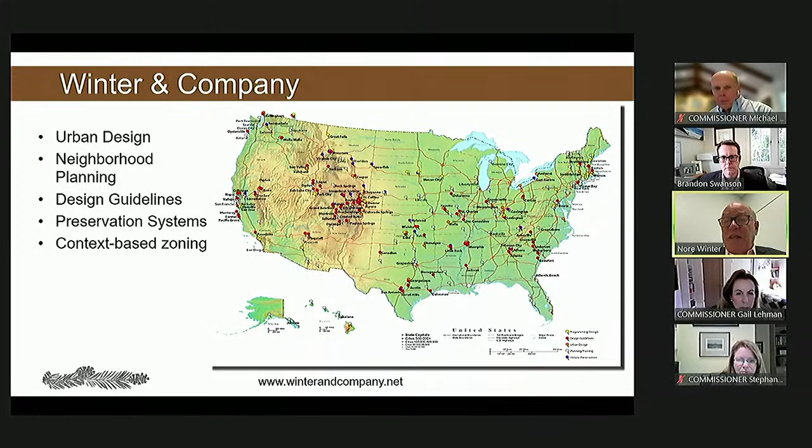We're starting from a good policy base that includes the general plan as well as a variety of other policy documents. We've been reviewing the background information related to the existing guidelines and zoning code along the way. Of course, some new factors that are influencing what goes into the guidelines today are recent state laws, such as SB 9 and the regulations about accessory dwelling units, and just the housing goal numbers that each community has now. There are a variety of informal materials that staff have been collecting over the years, a list of revisions, particularly to the zoning code, that should happen as a part of this project.

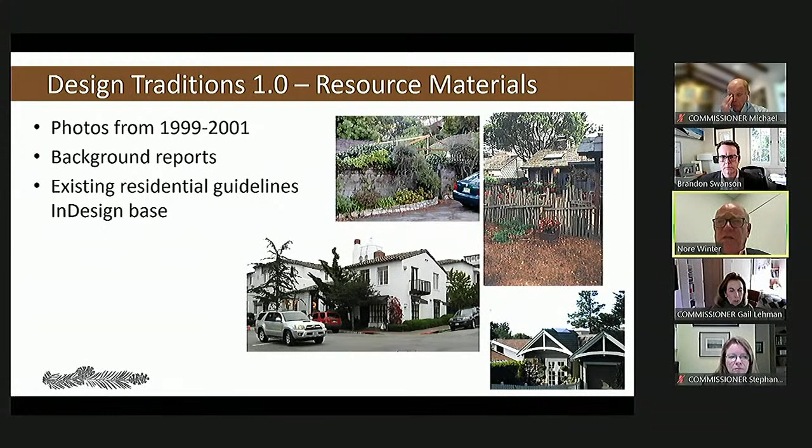The project is organized into a series of steps that are designed to bring us through a fairly logical step-by-step decision-making sequence.

The first objectives are to certainly get a good handle on existing conditions and then a good handle on the community sentiments.

We are planning for a community workshop coming up later in June. Out of that and the background information that we've collected and the work sessions we're having with staff...

...as well as the steering committee, we'll be developing a strategy that is an outline of the revisions that we propose be made. We'll be bringing that back to the community to confirm direction.

We'll have another community workshop related to that and also be presenting it again to you. Based on that direction, then we will move forward developing the formal draft materials for the design guidelines and for the zoning amendments.

That also will then be presented back to the community. We will make revisions based on comments and then develop the drafts for adoption with a target that adoption hearings would be occurring early spring of next year.

I mentioned the steering committee, and we've been meeting with them on a regular basis. We had a great work session a couple of weeks ago, and now we are preparing for the community workshops. We're saying they're hybrid, meaning they will be hands-on in person, but people can also join in online...

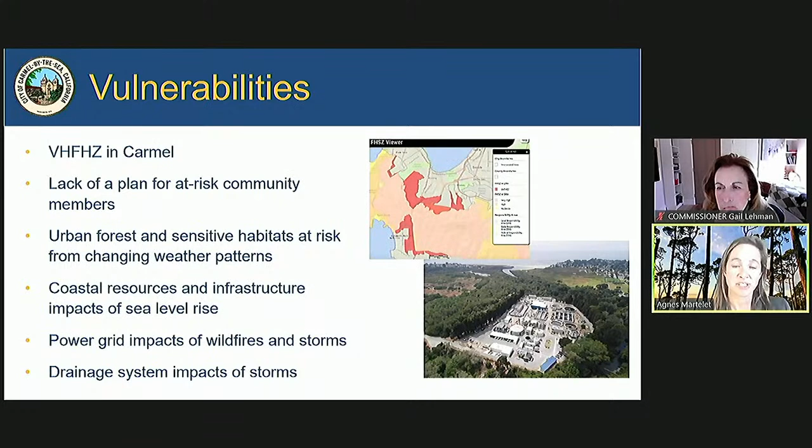We also have power grid impacts from wildfires and storms that we're already facing, and drainage system issues, including undersized drainage systems that need a lot of repairs.

The first policy to help our community resilience is to provide effective emergency preparedness and response in anticipation of potential climate-related disasters. Here we're trying to address updating our evacuation plan, making sure it takes into account our at-risk populations, and making sure it is shared with the community, that people are aware, and that we work with our community partners to make sure everyone is aware of our hazard planning. The other element under this policy is to work with our regional and community partners to increase wildfire resilience through inspections and FireWise certifications.

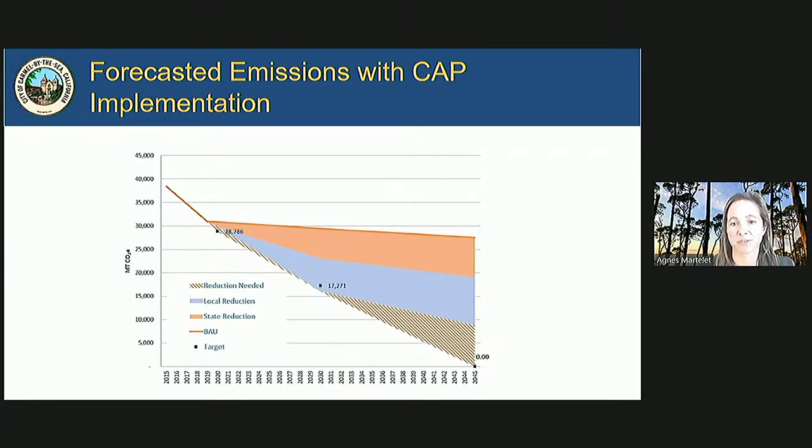And also incorporate in it the state's scoping plan, the latest scoping plan that will want to go also to carbon neutrality statewide, so that we can dovetail with the state and learn from our implementation so that we can get to carbon neutrality by that date.

First is to build on existing programs and partnerships. We have existing programs and we have many existing partnerships. So really building on those and leveraging those is critical.

Then is phasing implementation. We're not going to be able to do this in the next couple of years. This is a multi-year program, and phasing will help us be more successful in implementation. We'll also need to do significant public outreach and communication, because without the public, these plans, the implementation will fail.

Then the committee also recommended monitoring and evaluation on a regular basis so that we can adapt as we go, as we learn, as we implement. We can adapt and maybe change as needed and as we learn.

The committee also recommended hiring a grant writer / climate coordinator position to get funding for these projects, but then also help monitor and keep track of implementation. They also recommended the establishment of a sustainability commission that would help oversee the implementation of these two plans.

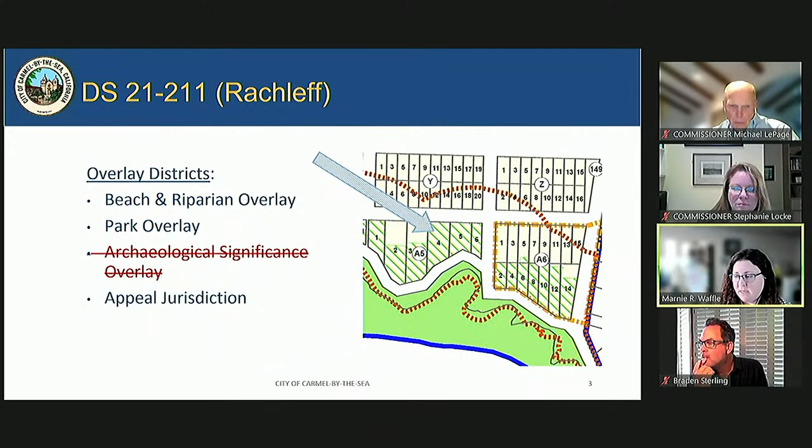Again, because the project is in the Beach and Riparian Overlay District, building height is limited to 18 feet. This is an existing nonconformity, so we're just documenting the existing ridge and plate heights. The applicant is not proposing to change those as part of the project. Staff has included a special condition that if the second story ridge beam or the structural roof framing is removed, the height of the building will need to be brought into conformance with current standards.

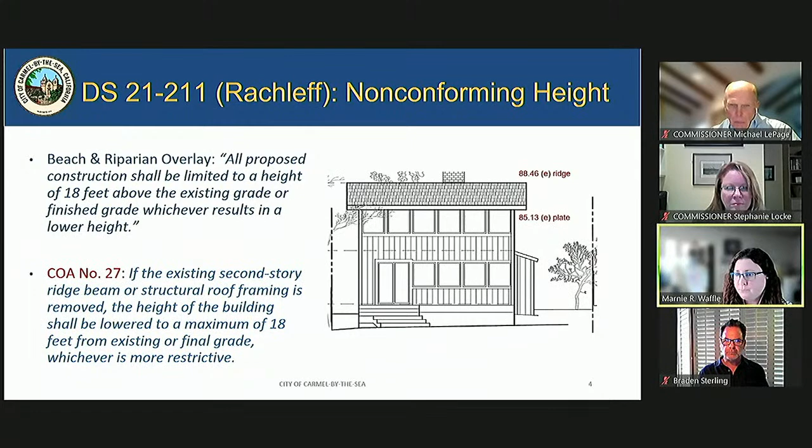So now I'm going to walk through the final details for the project. You did see some of these at the concept level.

The proposed building materials include horizontal natural age cedar with a clear sealer, proposed on the upper floor with board formed concrete on the lower floor. The board formed concrete would have an 8-inch rough sawn plank finish.

The proposed roof material is a standing seam metal. The plans identify it in bronze, but the applicant may want the option to do bronze or black, so that's something the council or commission can consider this evening.

Condition of approval number 29 requires the applicant to submit product information for the roof. Just prior to the meeting, I did get some product information, and the applicant is proposing to use Western States metal roofing, which has a very high matte finish and is found to be acceptable on other projects.

With respect to windows and doors, the applicant is proposing metal clad wood for the windows and most of the doors. The front entry door is proposed to be a glass pivot door, and the garage door is proposed to be a metal sectional door. Condition of approval number 30 requires the applicant to submit product information for all windows and doors prior to issuance of a building permit.

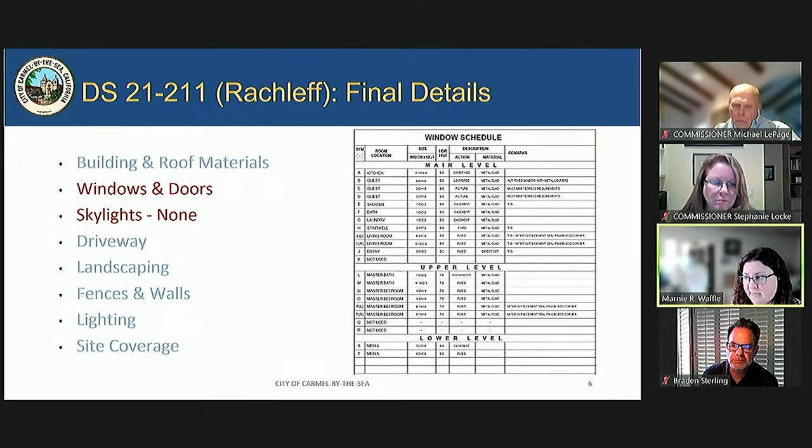With respect to the driveway, the applicant is proposing an permeable stepping stone paving block system in varying widths. The paving blocks amount to about 65 square feet of site coverage on the property, and the driveway is extended into the right-of-way as recommended by the residential design guidelines.

For final details review, staff did not get a representative photo of the material showing a color or finish. So the Planning Commission could provide direction to staff and the applicant on the design and material, and could consider adding a special condition of approval as appropriate.

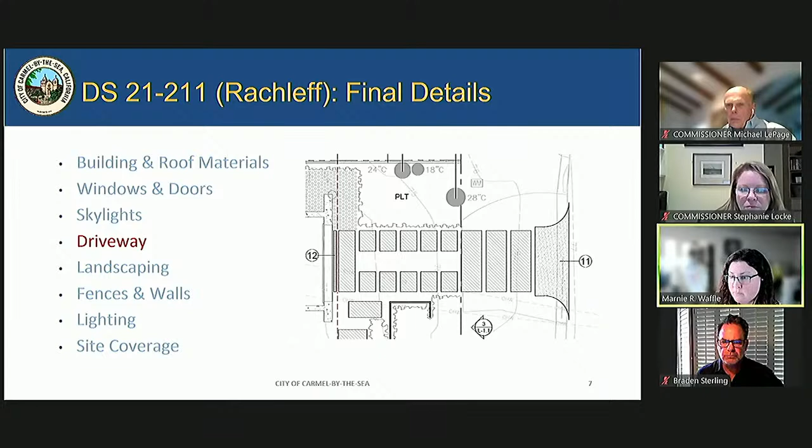Regarding landscaping, the applicant did provide a preliminary landscape plan. Unfortunately, I was not able to give the city forester enough time to review and comment on it prior to this hearing. So condition of approval number 9 requires that the plan be approved prior to issuance of a building permit, and the applicant does understand that there may be modifications to the plant palette once the city forester has had an opportunity to review it.

Also, staff has included condition of approval number 28, which requires that right-of-way landscaping be included in the final landscape plan.

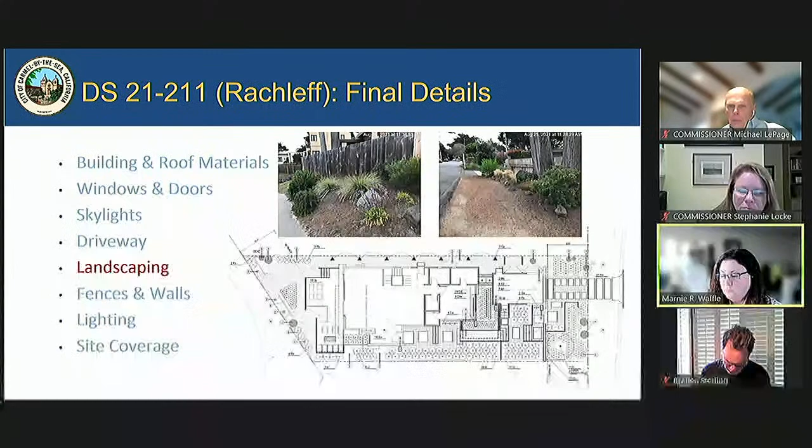So with respect to fences and walls, there are a couple of different materials proposed along Scenic Road, which is on the left-hand side of this site plan. The proposed material is a horizontal wood, and then on San Antonio we have some board-formed concrete and some metal panels. I'm going to walk through the different styles just briefly.

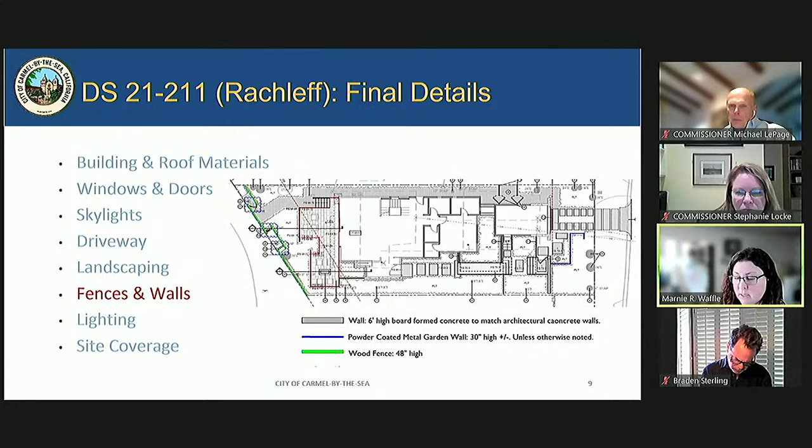Starting along Scenic, the proposed fence material is a horizontal wood. The intent is to match the aged cedar on the second floor of the residence. The detail shows that there is a minimal amount of spacing, however the rendering shows the boards with no spacing. So staff is seeking direction from the commission on what an appropriate spacing would be in order to achieve filtered views of the garden as recommended by the design guidelines.

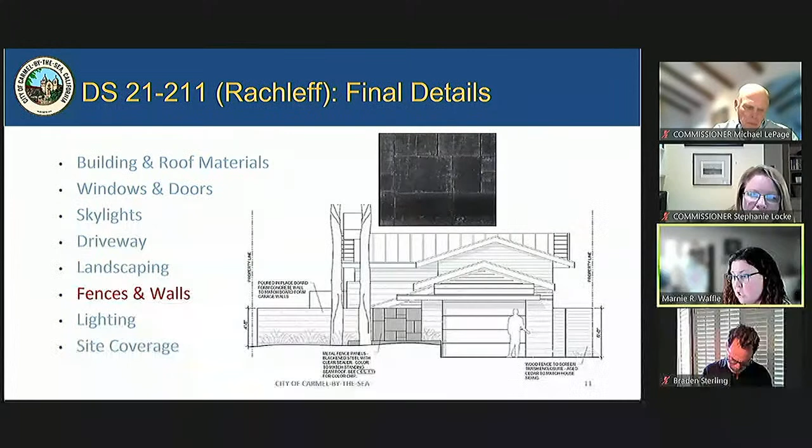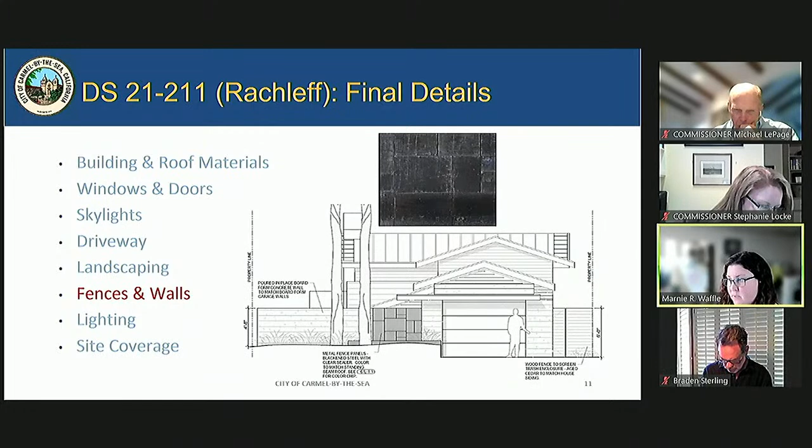Along San Antonio there are 3 different materials. Starting on the right-hand side, there's a wood fence that comes out from the side yard. On the left-hand side of the garage there are some metal fence panels, and to the left of that is board-formed concrete. So a variety of materials along San Antonio. Staff is looking for some direction from the commission on whether the mix of materials is appropriate.

And lastly, a metal gate is proposed. This gate would be accessed off of San Antonio, however it doesn't face the street, so it's oriented a little bit inwards towards the site and would not be as visible as it would be if it was fronting on the street. But again, on the materials, staff is just looking for some feedback and any special conditions as appropriate.

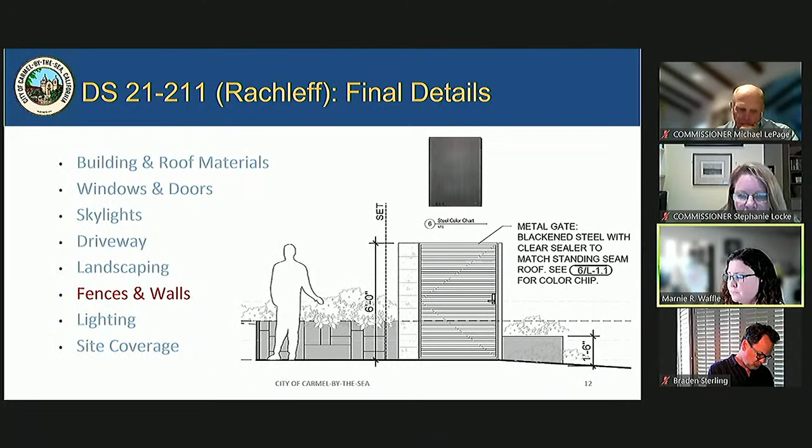The other light fixture proposed is a recessed wall light. All the lights are spaced 10 feet apart and located along pathways and outdoor use areas for safety. Staff did not receive a light fixture detail for any fixtures on the home, so condition of approval number 15 requires that the product information be submitted with the building permit application.

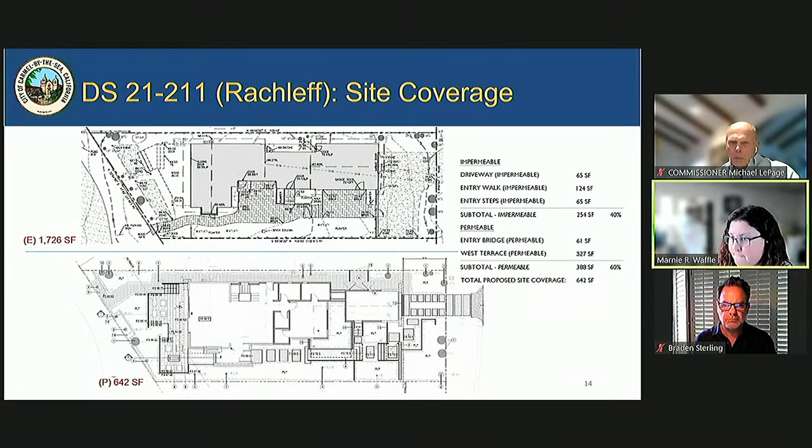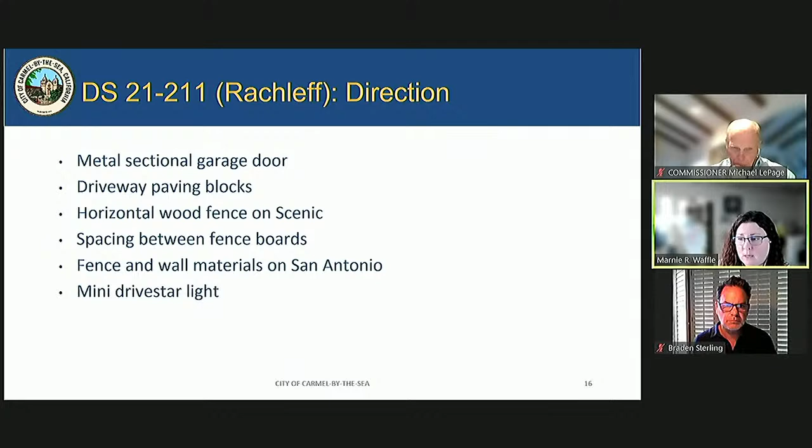Lastly, in summary, staff is looking for direction from the Planning Commission on the appropriateness of the metal sectional garage door, the color and finish of the driveway paving blocks, whether the horizontal wood fence on Scenic is an appropriate design and what the spacing between the fence boards should be. Also looking for feedback on the fence and wall materials along San Antonio, and the Mini Drivestar light as well.

With that, staff's recommendation is that the commission approve the design study with conditions. That concludes my presentation. I'm happy to answer any questions.

Are there any questions for staff from the commissioners? Mr. LePage, do you have a question? No, I don't. Not at this time. Okay. Thank you, Marnie.

I see Mr. Sterling's here. I assume you're going to be making your presentation, Mr. Sterling. Yes, good afternoon—or good evening, I guess, we're into the evening now. So hope we're all doing well. Thank you, Marnie, for the presentation. And for the record, Braden Sterling, Sterling Huddleston Architecture.

I just thought I'd quickly go through a few of the loose ends and then open it up for questioning. I wanted to point out a few of the very minor changes we made to the architecture since the last time we met. One of them, which I guess wouldn't be minor per se, is that we did remove the chimney off the architecture. I think it was a nice improvement and it was unnecessary, and I think neighbors and so on will all appreciate the reduced mass that resulted from that.

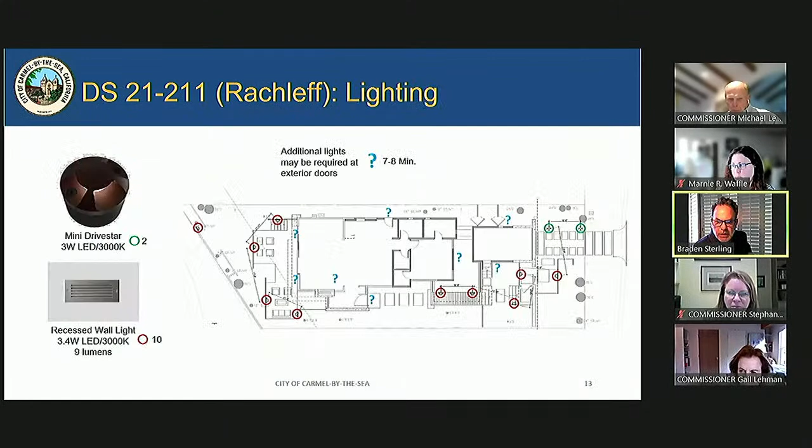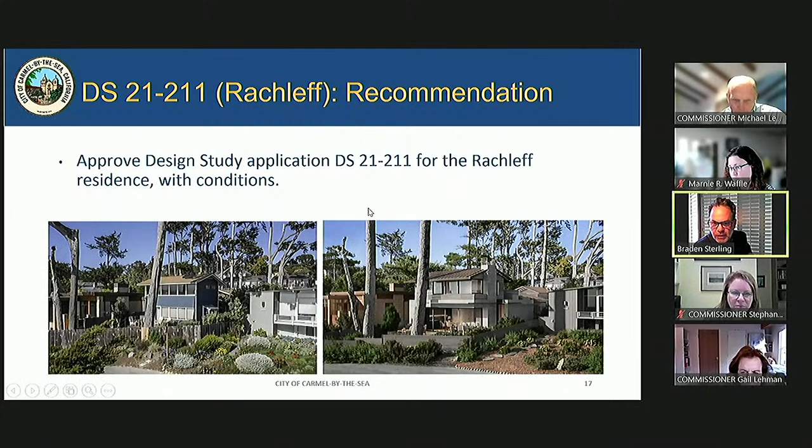Regarding roofing, we did go ahead and submit to Marnie earlier today some of our roofing samples, which also have a very low reflectivity data rating on them, so that can be reviewed and discussed further if you'd like. This photo here is from the original proposal, and the other revised drawings would be in that set. Thank you for fumbling through all this data here.

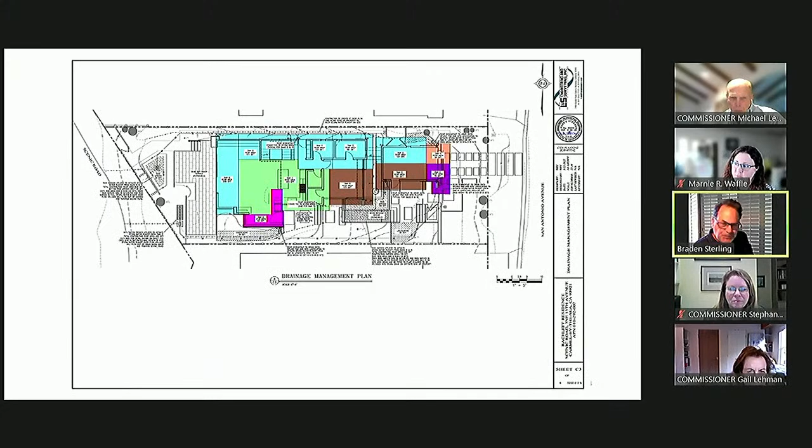Sorry, it's probably deep in the set. I can feel it coming.

So I just wanted to point to the top rendering there, and again, the reduction in the massing that we created on that.

To discuss the garage door, it's actually a cedar veneered frame, so the garage door is to match the materials on the house. It will have approximately every 12 inches a horizontal half-inch reglet, which will match the roofing, either a dark black or bronze color inlet. So it is not a metal sectional per se, it is a cedar product that will match the exterior siding.

The fencing, I wanted to point out some of the design intent along Scenic with our fence. We have lowered the fence to 42 inches, so I think that makes the house feel a little more inviting. It does present well on Scenic.

If you recall, as you come down Scenic on that particular stretch, the house is set to an angle, so what you're viewing is the corner of the property line as you come towards the house. What we've done is stagger the fence, and on those returns, they're open with a horizontal cable rail or bar, which provides complete transparency into the gardens. So you won't have this solid fence look as you come around with your vehicle on Scenic. Again, lowering the fence and using materials that I think will weather well and just become part of the landscape eventually.

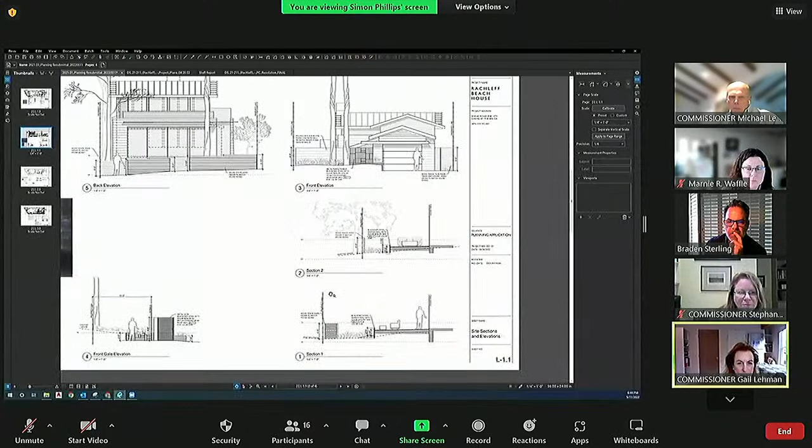One here. So the way this works in plan view is we have the face of the garage and then the board form concrete wall running down to the south. The gate actually sits inside that wall, so it doesn't present itself straight onto the street. What you're seeing from the street is just an opening between the two concrete elements. So the gate actually sits here on the south side.

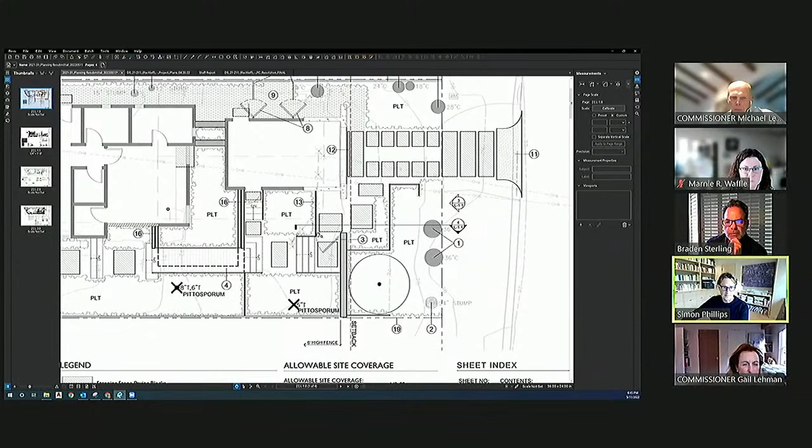And then in elevation, which one was it? It was this one here. So we're looking at using the metal again to pick up on some of that architectural palette. It would be an open horizontal flat bar fence, so you would see through the gate as well from inside to outside.

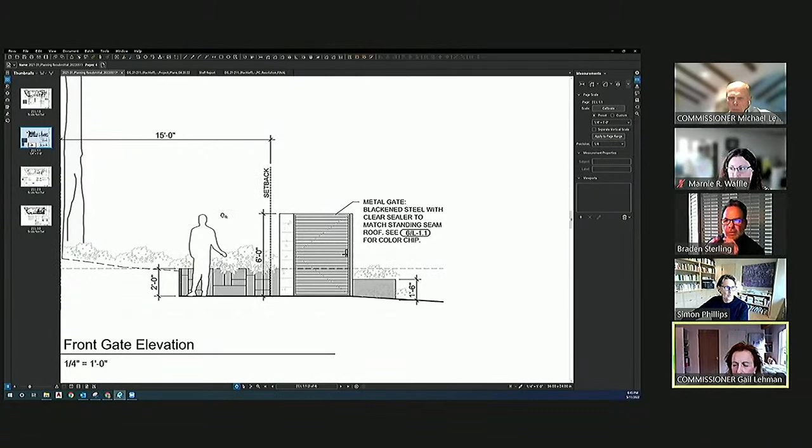Is there a reason that it has to be 6 feet? Could it be lower is what I'm getting at. I think our guidelines—are you in the setback? We're not, we're behind the setback with all of this. So the setback line is running along here, and we are inside outside the setback. You're outside the setback. Right, so this is the setback line, this red dash line. You're behind the setback, right? Yeah, behind the setback. Correct. Okay, just for clarification.

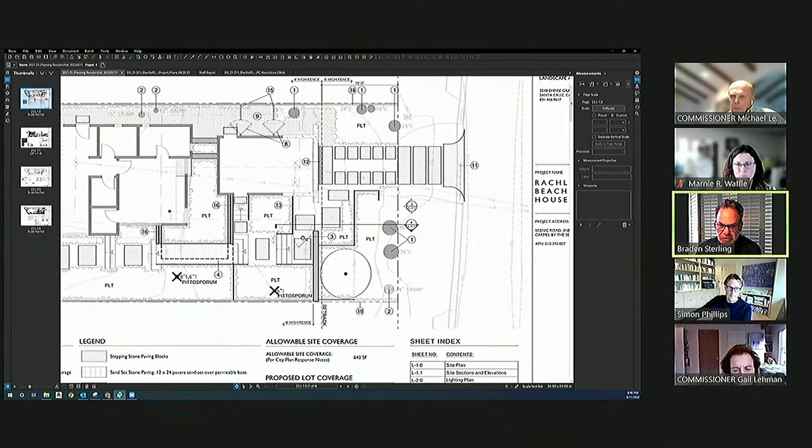I think I'd like to add, just for clarity, the elevation of the street and the elevation of the terrace, the hotel across the street, gives kind of a looming view down into this property. So height is beneficial for them in terms of privacy from that commercial use across the street. Yeah, I get it.

Commissioner Dells, did you have a question? Gail just asked it, so I'm good. Thanks. Okay, any other questions? Okay, thank you guys, appreciate it. Thank you. Okay, open up to the public. Is there anybody from the public that wants to make any comments regarding this application? I don't see any hands going up. I don't hear anybody, so I'm going to close the public comments.

Open it up to the commission. Commissioner Lehman, you want to begin? Sure. I like everything about this project. I love getting rid of that blue, big, tall rectangle, and it doesn't seem tall anymore because you've done all these horizontal members across the front and bisected it, and I think it's terrific.

So I understand the need for privacy from the hotel. Otherwise I would object to that gate being so high, but I'm not going to. I think it's a great job and I'm really going to be pleased. I walk scenic just about every day, and I'd be thrilled walking past that instead of what's there right now. So thank you.

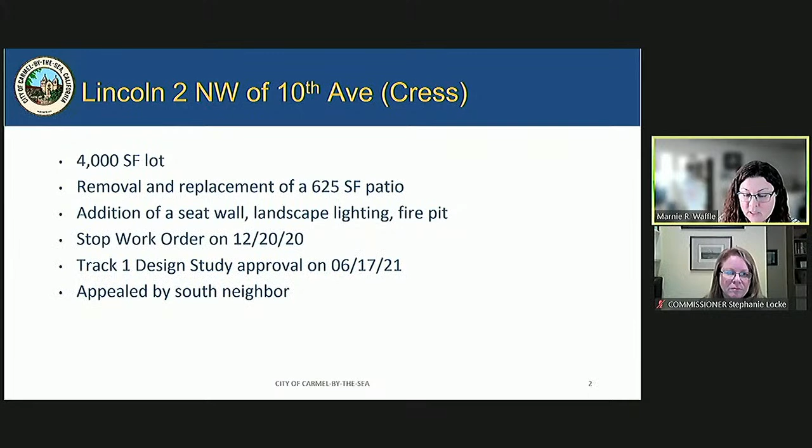Thank you, Chair LePage. So I'm going to start by going through a little bit of the background. This is a 4,000 square foot lot. Back in December of 2020, a stop work order was issued for the reconstruction of a patio without permits. The work also included a new seat wall, landscape lighting, and a gas fire pit. The owner subsequently applied for a design study, which was approved by staff in June of 2021, and the approval was then appealed by the south neighbor due to concerns regarding drainage and privacy.

So the patio was constructed at a higher elevation, and it covered a greater area of the natural soil and is also impervious. So the neighbor had concerns about runoff from the patio being directed onto his property. Additionally, a new fixed gas barbecue was to be installed on the south side of the raised deck, and this created some potential privacy concerns to the south neighbor.

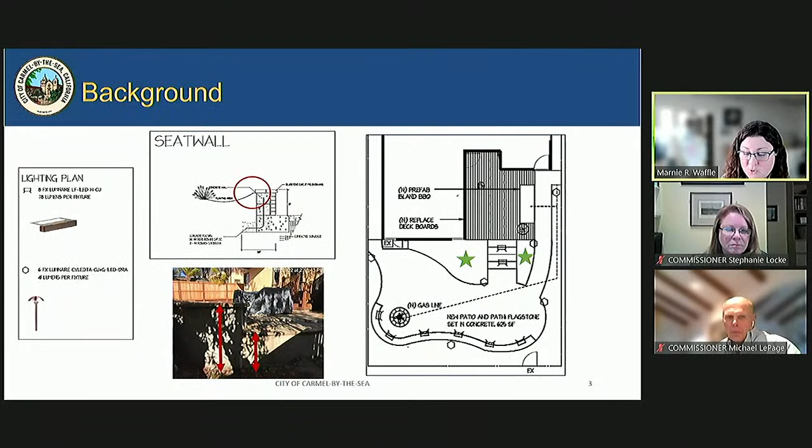The applicant has made some significant modifications to the project in order to comply with the site coverage limitations. The patio has been reduced from 625 square feet to 86 square feet. The hardscape has been replaced with a drought-tolerant ground cover that will also be used to retain stormwater. A new drainage plan was prepared by Monterey Bay engineers and demonstrates how all stormwater will be managed on site. The plan was reviewed and accepted by the city's environmental compliance manager. The revised project also includes more landscaping along the perimeter of the patio, which will help with reducing soil erosion.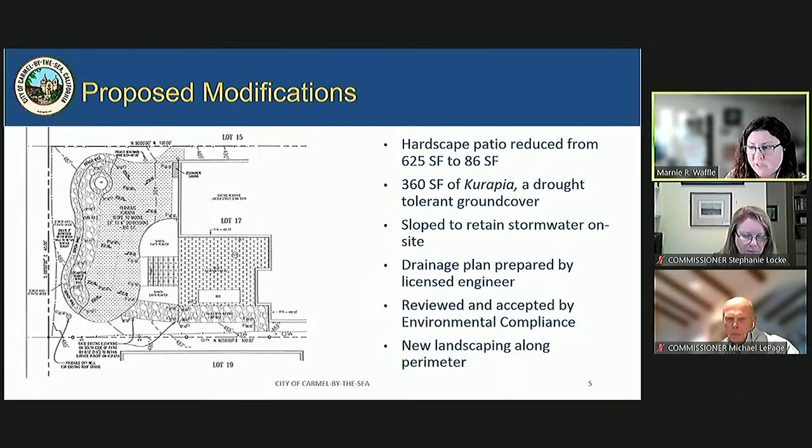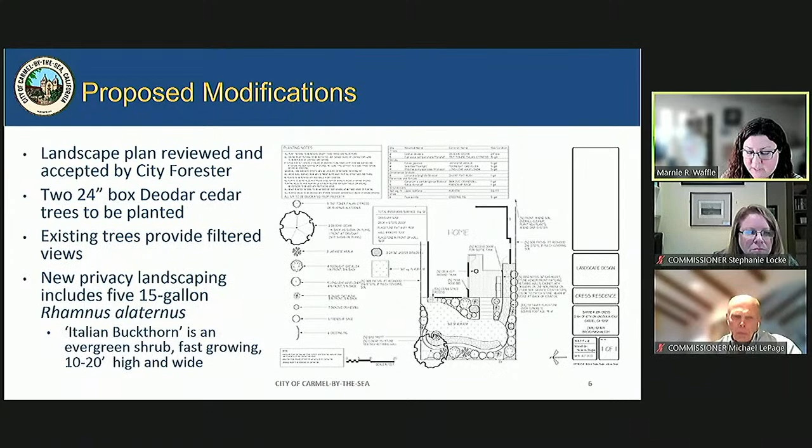The landscape plan for the entire backyard has been submitted, reviewed, and approved by the city forester. The plan includes 2 new 24-inch box deodar cedar trees, one to be planted in the backyard and the other at the front of the property. The landscape plan also identifies privacy planting on the south side yard near the gas barbecue, consisting of 5 15-gallon Italian buckthorn shrubs. This plant is evergreen, fast growing, and can reach 10 to 20 feet in height and width.

The backyard improvements also include new lighting. The residential design guidelines encourage using lights only where needed for safety and at outdoor activity areas. The municipal code requires that all landscape lighting be spaced at least 10 feet apart. The applicant is proposing 3 styles of light fixtures: a wall-mounted spotlight, a path light, and a seat wall and step light. Condition of approval number 23 requires that the seat wall lights be spaced 10 feet apart. Staff is also recommending that the path light behind the seat wall be eliminated, and that the spotlights be reduced from 3 to 2 along the south side yard.

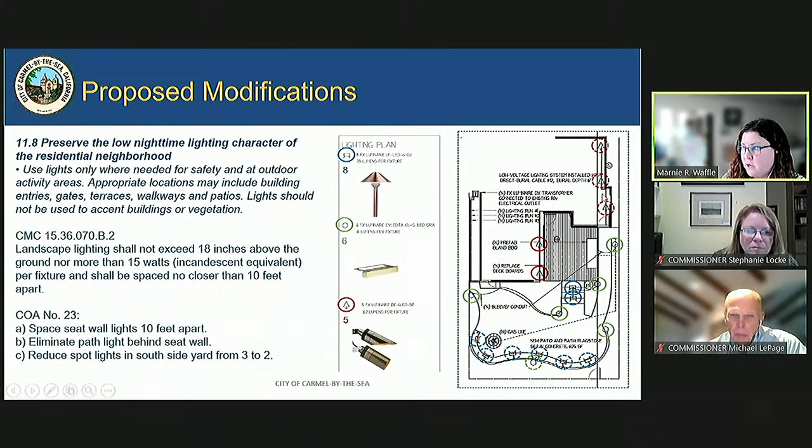To summarize the applicant's response to the Planning Commission's direction from February: the total site coverage has been reduced and now complies with the maximum allowed at 556 square feet. The patio will be reconstructed at grade and has been reduced from 625 square feet down to 86 square feet; with the seat wall, it's 135 square feet total. The pavers will be set in sand to facilitate on-site percolation of water, as stated in condition of approval number 20. The drainage plan has been revised, resubmitted, reviewed, and approved by city staff. The 2 deodar cedar trees are included in the planting plan, and the privacy landscaping is also identified on the landscape plan.

So we are back before the commission this evening for final action on this appeal. After the staff report was published, staff did get some additional comments from 2 neighbors. I'll start with the southwest neighbor, who is not the appellant but is an adjacent neighbor. Her concern is that the kurapia ground cover that replaced the patio is not adequate for heavy rain and that there will continue to be overflow onto her property.

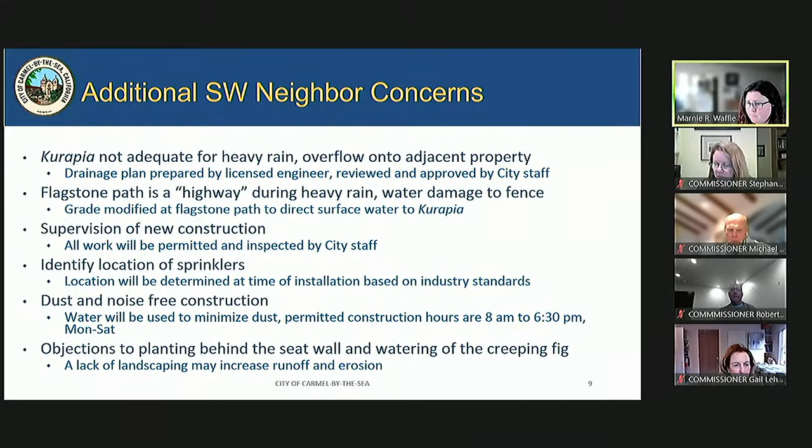The following concerns were expressed by the south neighbor, who is the appellant. His concerns were that he'd like to see that south side yard walkway placed at grade and made of a pervious material, or alternatively, that the pathway include a curb to prevent runoff. Staff would not be supportive of the curb because it would add to the site coverage, and it's also uncharacteristic of the forest setting. We do believe that based on the drainage plan and the modified grades, that all stormwater will be directed towards the ground cover and not towards the south neighbor's property.

The neighbor is also concerned that the privacy planting is not going to be sufficient. However, based on my review of the Italian buckthorn, being that it's an evergreen shrub, it is fast growing and 10 to 20 feet high and wide, it should provide a very nice privacy hedge between the outdoor barbecue and the south neighbor's windows. I also wanted to mention that there are some existing trees in that area that provide a higher canopy, which will also help with privacy.

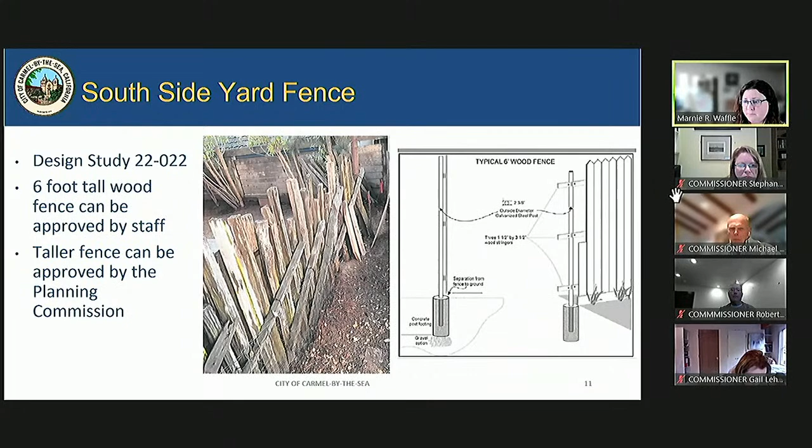With that, staff's recommendation is that you adopt a resolution granting the appeal in part and approving a new design study, DS 21078, for the modified project. That concludes my presentation. I'm happy to answer any questions.

Questions for staff? No questions. All right, thank you, Marnie.

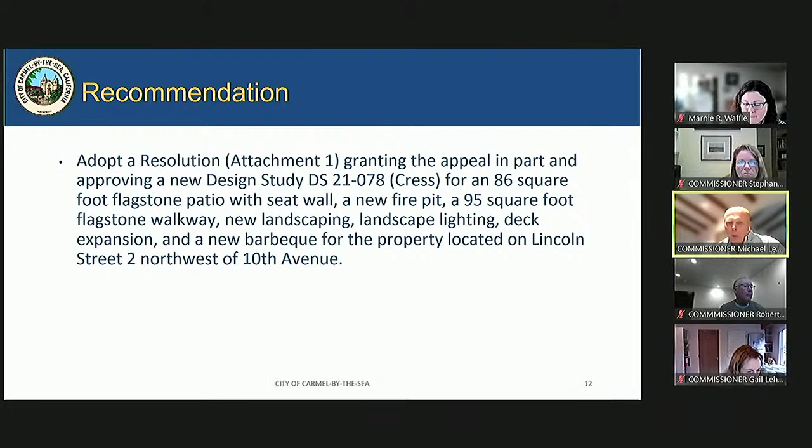Is the applicant here? Would they like to speak to the Planning Commission regarding their application? Hi, I'm the applicant, and Marnie represented us very well. We took everything that you had sent into consideration, and we hope that we did our best to fall within all of your guidelines.

Are there any questions for the applicant from the commissioners? Is the 6-foot fence something that you would like? The current fence that is there is not acceptable for probably either of our houses. However, it is actually encroaching on our property line, so we've lost about, I don't have the specific numbers, but I'd say about a foot. So the fence needs to be replaced in order for us to have proper property lines. In addition, we would be absolutely fine with having a new 6-foot fence constructed. Okay, thank you.

Any other questions for the applicant? Okay, thank you. Are there any members of the public that would like to address the Planning Commission at this time regarding this application?